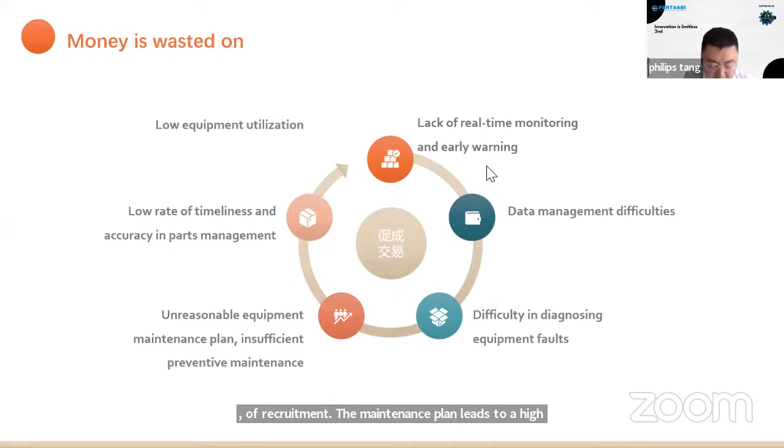This is the first. Second, unreasonable equipment maintenance plan, insufficient preventive maintenance technique. Lack of an effective equipment maintenance plan leads to a high failure ratio of equipment, and the lack of preventive maintenance of the equipment leads to shortened life and frequent equipment failures and prolonged maintenance cycles. Maintenance cost is increased and productivity is affected. Having a good plan facilitates parts forecasting and stocking.

Third, real-time monitoring and early warning. This is important to monitor the states and performance indicators of the equipment in real time, to detect faults or abnormal conditions in time. Lack of this results in increased equipment downtime and decreased production efficiency. The lack of monitoring the device and analyzing its long-term performance makes it difficult to find parts that need to be replaced in time, which affects the timeliness of parts supply and will inevitably increase the inventory of parts to deal with emergency repairs.

Next, data management difficulties.

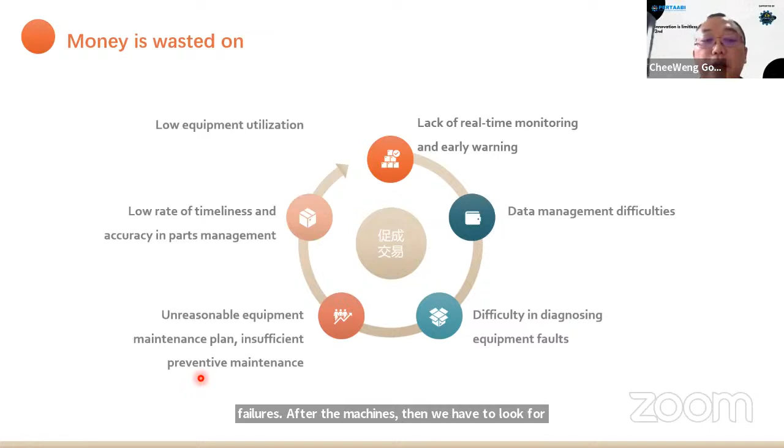Number 4, he says that most of these mining companies in China do not have a proper maintenance plan. When we require a maintenance, it's always on an ad hoc basis. If there are no maintenance plan, therefore it's always failures after the machines, then we have to look for spare parts. This actually causes insufficiency of preventive maintenance.

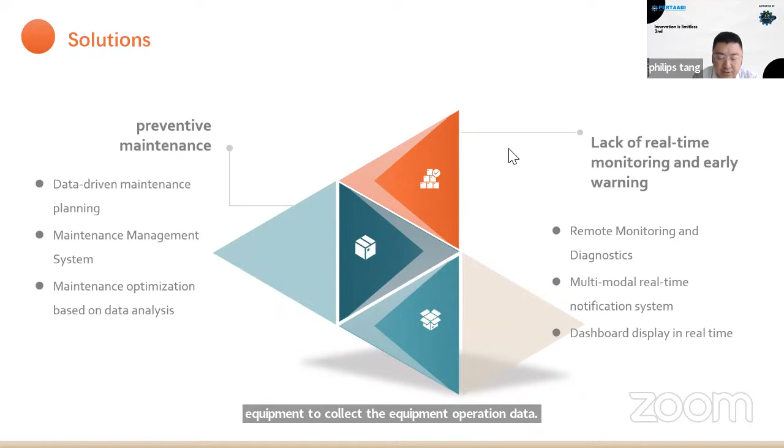Preventive maintenance - data-driven maintenance plan. Use sensors and monitoring equipment to collect equipment operation data and predict equipment failure and maintenance needs through data analysis and machine learning. Based on the data-driven prediction results, make a reasonable maintenance plan, schedule maintenance work in advance, and reduce repair cost and equipment downtime.

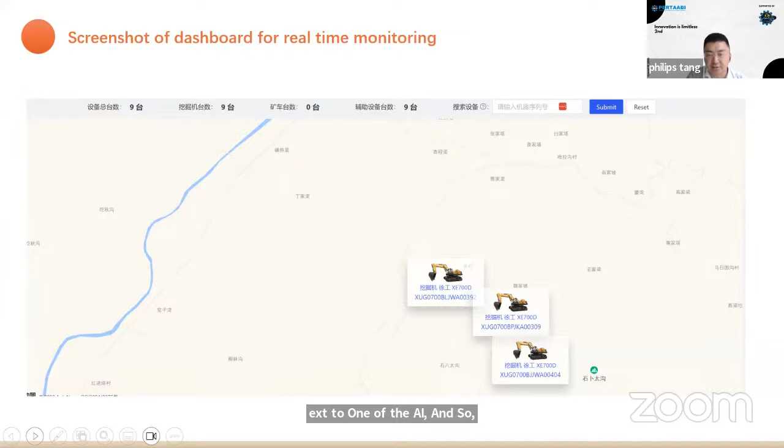The maintenance management system is based on a big data fault detection system. We have noise recognition and AI technology - through sound and sensors we can detect equipment faults before they happen, and prepare parts in advance. He has come up with a preventive maintenance system that can predict machine failure by detecting the noise level produced by machines. The system captures the noise with sensors, processes this data, and can give you a signal or alarm telling you the probabilities of failure for each component.

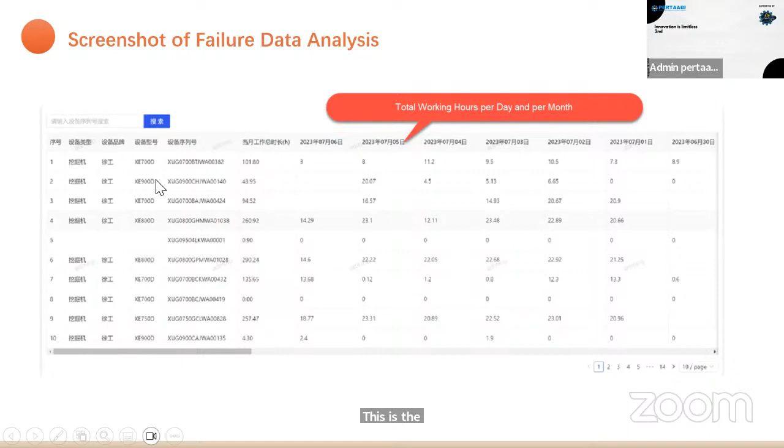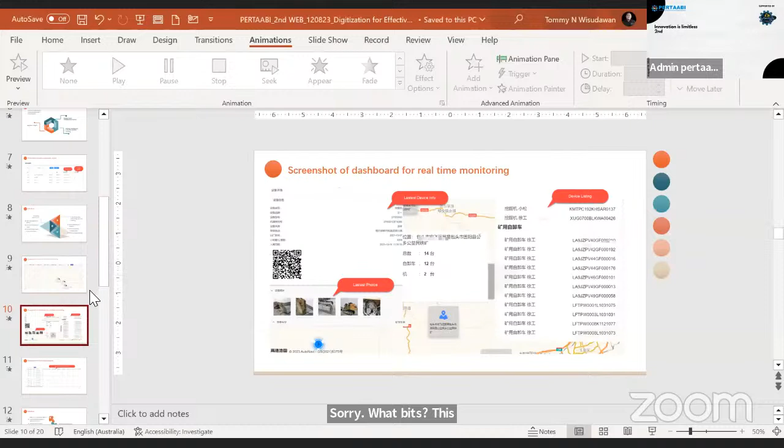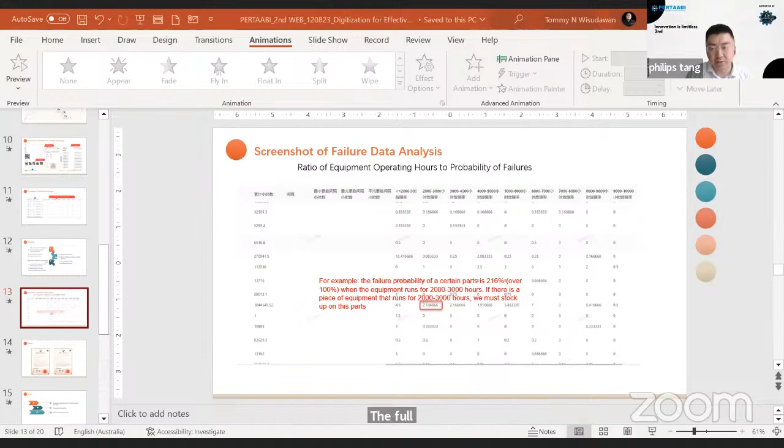Next, let's see the screenshot. Is this the page? Previous slide. Which one? Sorry, the slide is on automatic slideshow. Is this the one? Screenshot of failure data analysis report, ratio of equipment. Is this the correct one? What page? This page? Page 13? Failure data analysis - oh okay, this one, page 13. Mr. Go, slide number 13, right? Screenshot of failure data analysis - is it this page on screen now? Yes, this is the slide.

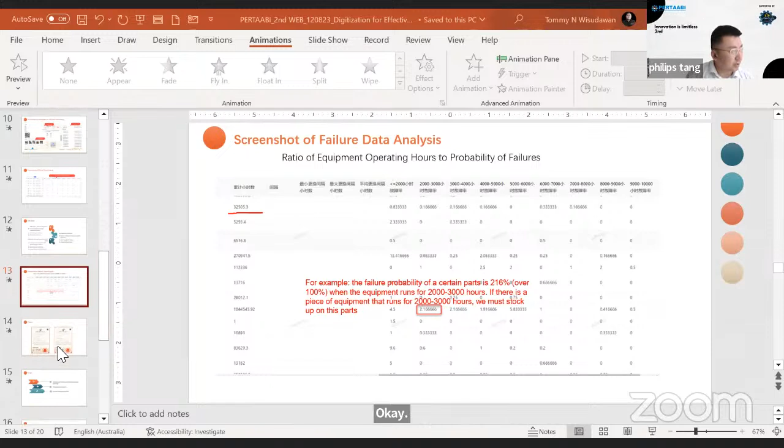Okay, I'm done explaining. Jump to slide 18 - case studies and the benefits for the customer.

Create revenue for the users and bring high profits. This is one of our successful cases to share with you.

Mr. Chong, do you want me to help share the full screen? Let me help translate this page for you. This is the last page Mr. Tang is trying to share - he's trying to show the results.

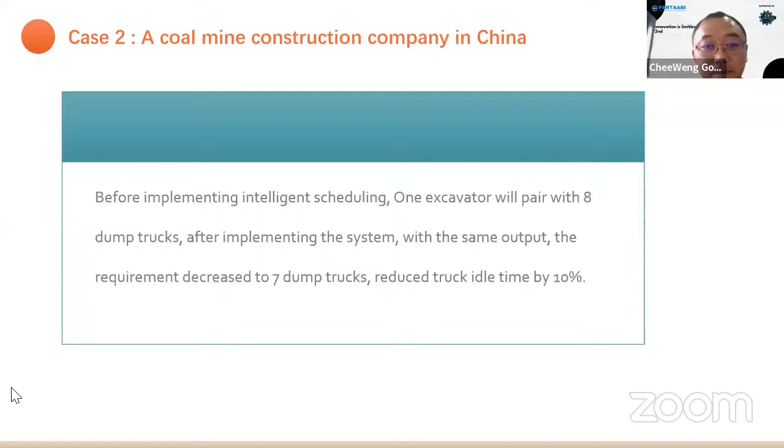I think it's the previous one. Okay, this is the last page Mr. Tang is trying to share today, showing a before and after comparison of a mining company in China that uses his system.

Mr. Wang says he's very honored today to be invited by PERTAABI this morning, and he's very happy to be here sharing his work about the intelligent automatic lubrication system, and why the automatic lubrication system is the trend in the mines of Inner Mongolia. He's very excited to share about his topic today.

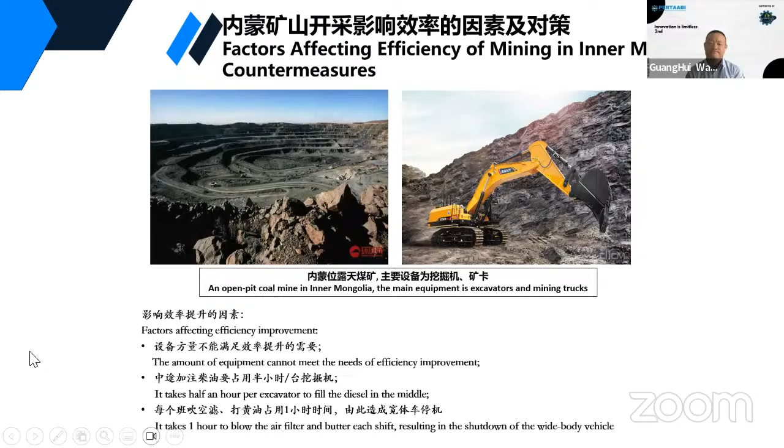In Inner Mongolia, the practice is to change operators without changing machines, so the machine works continuously. During each shift change, the operator must clean the air filter and apply grease, which takes about 1 hour, during which the mining truck must stop operation.

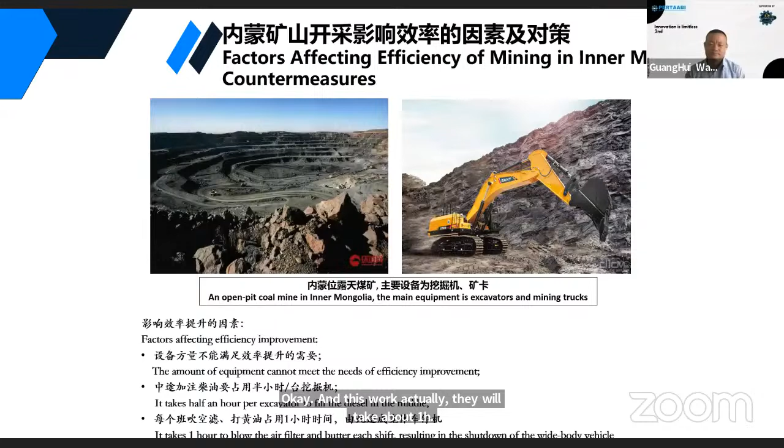Next slide please. He will now share solutions to address the problems mentioned above.

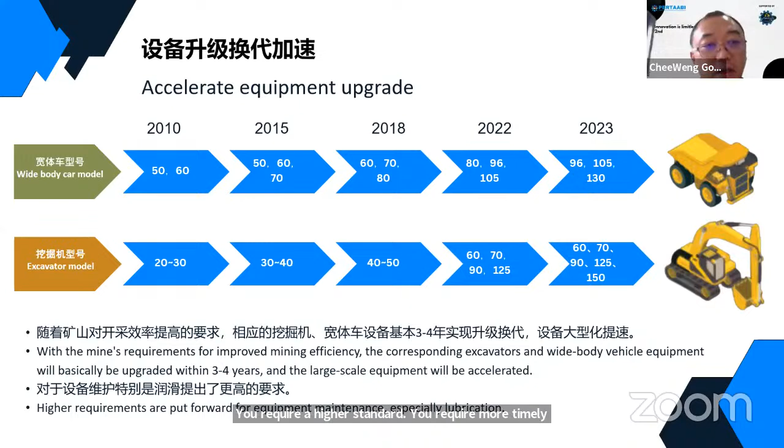Before it was 1 hour, now it's 6 minutes. Before it was half an hour, now it's 6 minutes. For 100-ton excavators, before introducing these large fuel dispensers, it required 30 minutes to pump fuel, but now with larger dispensers, it only takes 6 minutes. This shows that every second counts in mining operations - they will do whatever possible to reduce fuel-adding time.

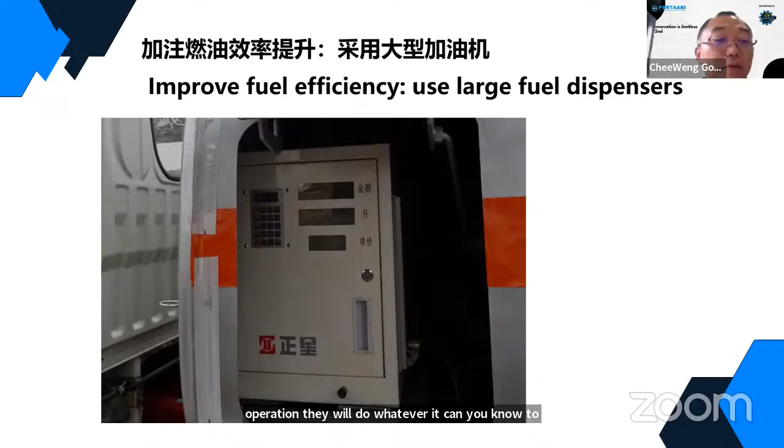To reduce the maintenance time required for machines, there are two key things: one is to introduce a better air filter, and the second is the greasing process.

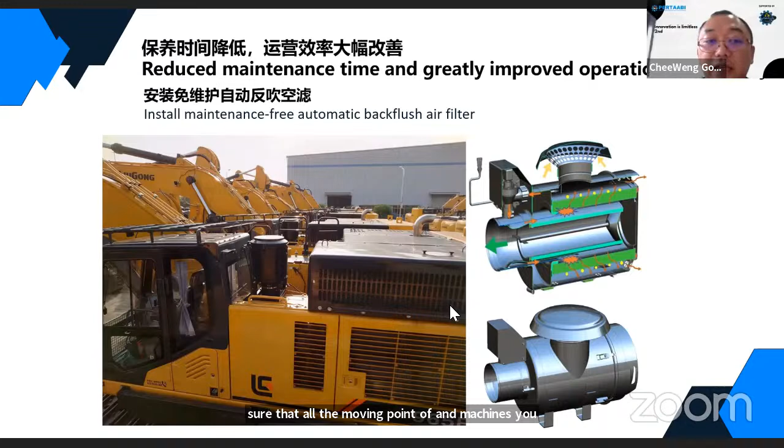这里面就是打黄油这个呢，就是每天都要从事的，而且呢频率很高的，2个班呢都需要进行动态的、实时的这种维护和保养。

He's going to show how this automated lubrication system can improve operational efficiency. Lubrication, the greasing work, is actually very crucial for maintenance of the machines. 内蒙的工况下来是换人不换机，因为这个挖掘机一打黄油，这个矿卡就要停下来，因此呢改变了，加装了自动润滑系统。

王总，您要不要讲解一下您这个表怎么解读呢？我讲解一下，你先翻译一下。He's going to share with us the results after applying his automated lubrication system.

从几个方面进行数据分析。第一个，从出勤率方面，没加装自动润滑前，每天因为是2个台班，误工了2个小时，1年施工按照300天算，每年的收益损失就是36万美元。Before installation of the automated lubrication system, assuming there are 2 shifts, one shift is about 10 hours, every shift requires 2 hours just for greasing work every day. Assuming one machine is working for 300 days, at the end of the day, for each machine there is an annual loss of $360,000 just because the machine needs to stop for greasing works.

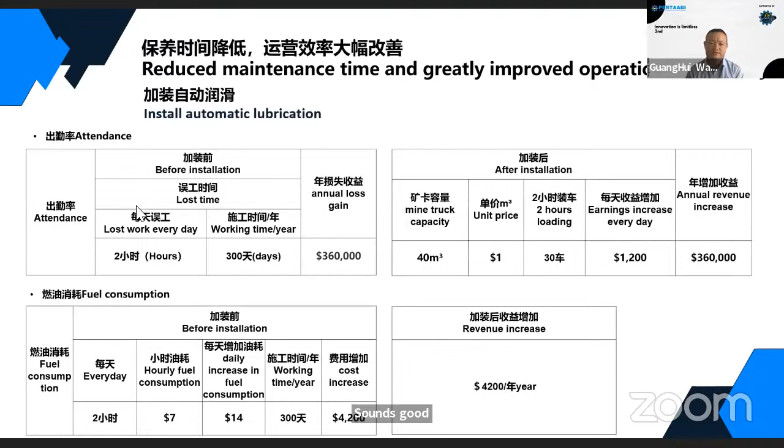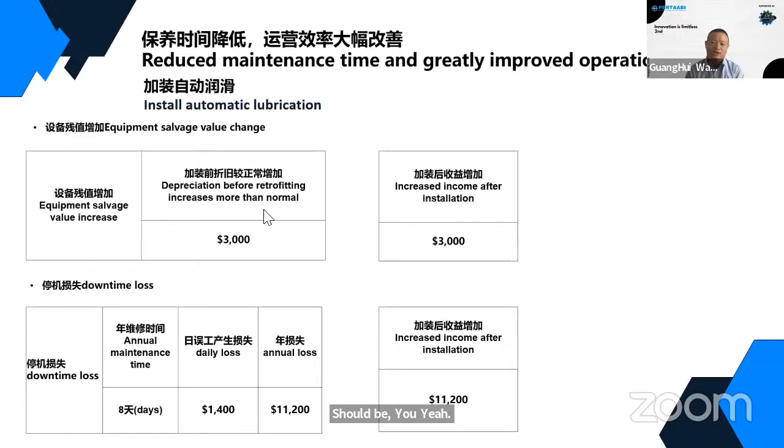设备残值的一个增加，就是没有加装自动润滑前，如果说这台挖掘机轴套都是光的，会导致残值率大幅下降。我们算了一下，1年大概这个挖掘机除了正常贬值的情况下，会下降3000美元。3000美元是每1年吗？每1年。Mr. Wang says that now he's talking about the residual value of the machine.

Okay, if we do not do a proper job for the greasing work, if we do not install the system, if we rely on the operator to do the greasing for the machines, actually it causes more damages to the machine and resulting in more depreciation. Based on a conventional or traditional depreciation, that will cost $3,000 more annually based on their studies, if we do not do a better greasing work. 根据我们对挖掘机客户的数据统计，加装完自动润滑呢，比正常的没加装的轴套的寿命延长大概2年左右，所以每年的收益增加，对它的残值率是增加3000美元左右。Okay, if we install the system, if we let the greasing work go automatically, then the machine condition will become better and we will have a better residual value. Instead of $3,000 more in depreciation, then we can convert this to become our income.

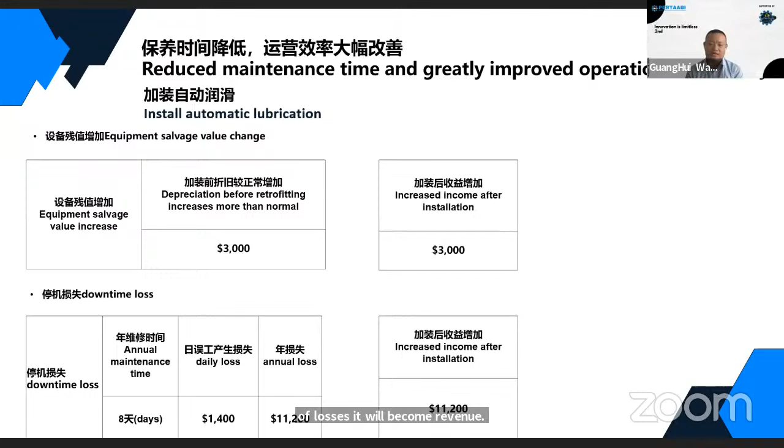维修费用呢，我们也给算了一下，每年的维修费客户从每年3000美元左右，这个数据也是没加装前比较保守的一个数据。为什么呢？因为设备越来越大，轴套成本非常高，仅动臂这一个下来可能3000美元都不止。加装后呢变成了收益。Okay, this $3,000 is the money spent to replace the pin bush for the boom and stick annually. If we install the systems, we do not need to change the pin and bush, we do not need to do maintenance so regularly. Therefore, this $3,000 spent instead will become our revenue.

王总，您继续。再一个就是对油脂的浪费，因为自动润滑是定时定量，节约油脂，实时润滑。每个月人手动润滑要多浪费，以一个80吨左右的挖掘机为例，每月要多用30升，每月的浪费在100美元，每年在1200美元。加装后呢，这个浪费变成了收益。Okay, let's talk about the grease wastage. If we depend on the operator to do the greasing work, every month there will be additional 30 liters of grease wasted. Converted into dollars, it will be $100, so the annual loss will be $1,200. But if we apply the smart automated lubrication system, the grease will actually input at the right amount, at the right quantity, at the right time. Therefore, no wastage.

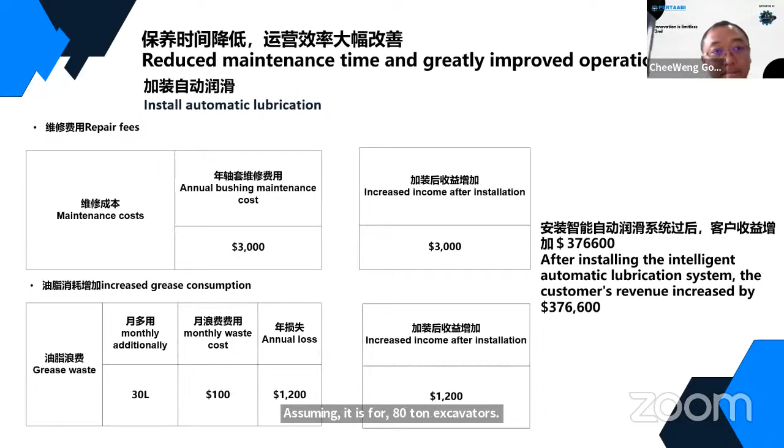下一页。Next slide, please. 这是我们的一些案例展示，这个自动润滑适用于所有机械设备的润滑，它的应用范围是非常宽的。Mr. Wang is showing his case study. He's telling everyone that his system can apply to all kinds of machinery, such as wheel loaders, mobile crusher, excavators, and boring machines.

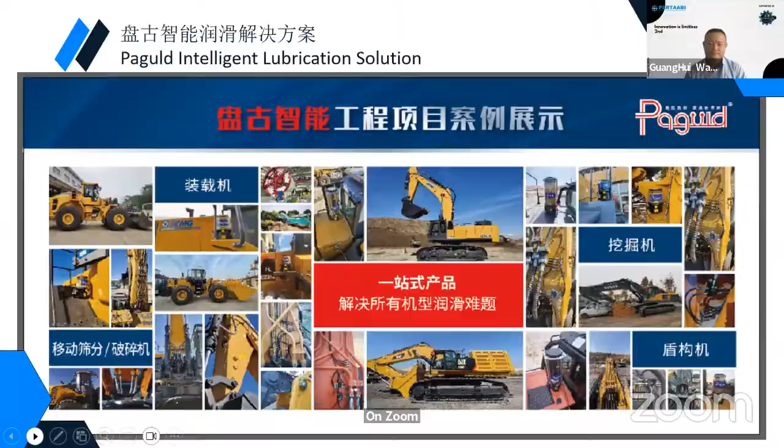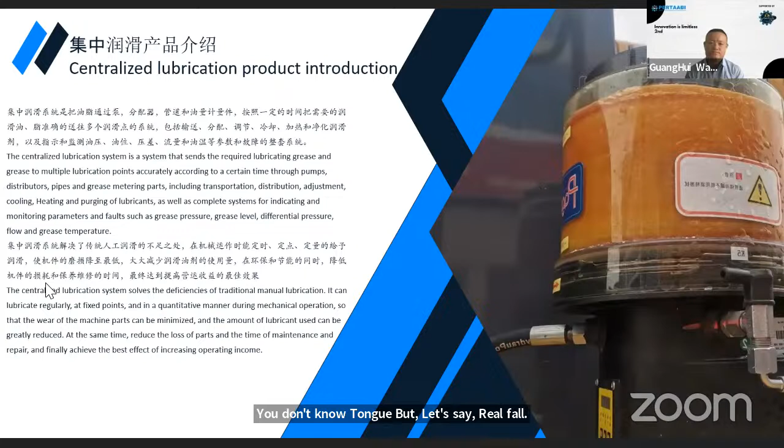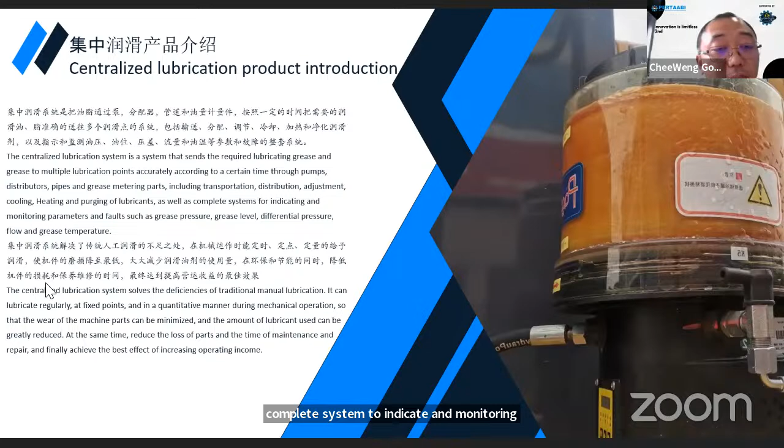王总，请下一页。Next slide. 集中润滑就是这套系统，是通过一个泵来把所有的润滑点根据需求匹配起来，通过定时定量，它有自动记忆的功能，来实现每个润滑点定时定量的润滑。Mr. Wang says that the centralized lubrication system is a system that sends the required amount of grease to multiple lubrication points of the machine accurately, according to a certain time, through the pump, through the distributors, pipes, and the grease metering parts, including transportation, distribution, adjustment, cooling, heating and purging of lubricants, as well as a complete system to indicate and monitor parameters and faults, such as grease pressure, grease level, differential pressure flow, and grease temperature.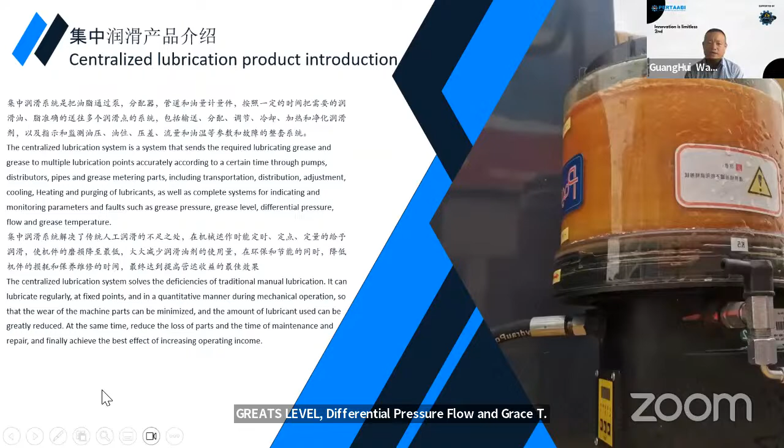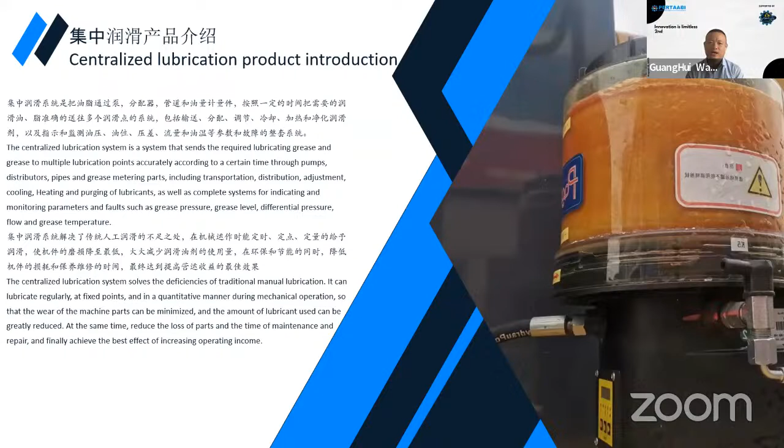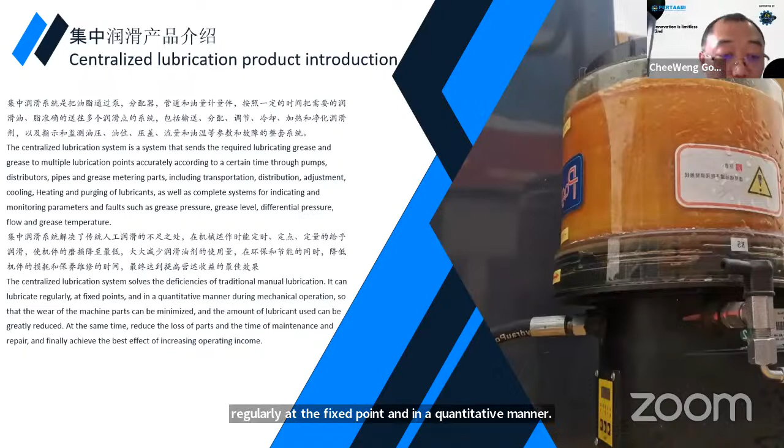王总，您继续。自动润滑与传统人工相比，它是定时定量，而人工润滑是凭感觉润滑，对润滑效果来讲还是有差别的。所以自动润滑是个必然趋势，欧美是个标配。Okay, for the automated lubrication system, compared to the traditional manual lubrication, it lubricates regularly at a fixed point and in a quantitative manner during mechanical operation, so that the wear and tear of the machine parts can be minimized. However, based on traditional manual lubrication, the operator normally will base on their gut feelings - they think these points have good enough greasing, then they will stop. It's solely based on the gut feelings of the operator. Right now in Western countries, the lubrication system has become a standard accessory for machines.

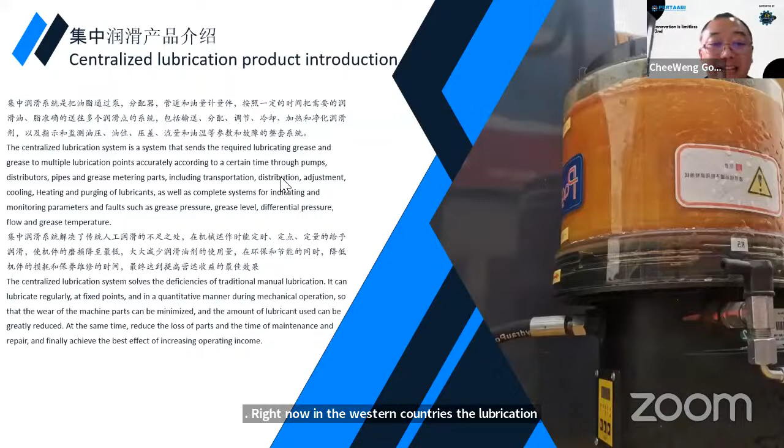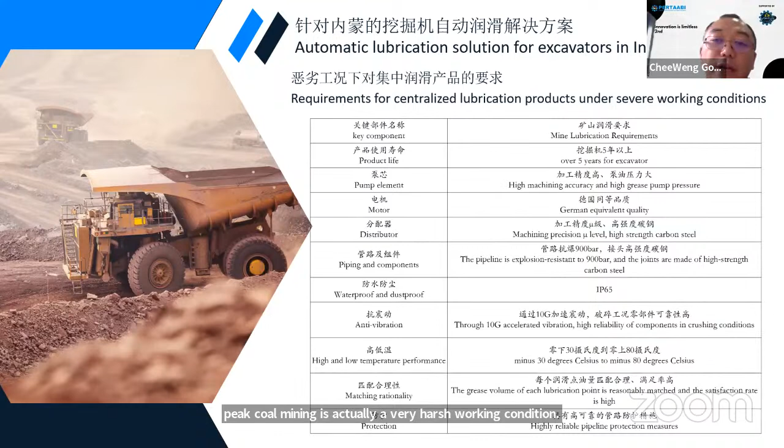王总，您继续。下一页，请下一页。针对内蒙的自动润滑，这里面呢，挖掘机和矿卡是最恶劣的产品，所以这种工况对集中润滑的要求也是非常高的。Okay, especially for Inner Mongolia, the open pit coal mining is actually a very harsh working condition. Therefore, the requirements for this automated lubrication system actually have a very high requirement.

王总，您继续。所以这里面首先是产品的寿命，刚才前边我们这位朋友也问过，他对这个考验是很大的。既然考验，那我们在矿山上的挖机寿命至少要有5年以上的设计，因为他们换机基本上3年。Mr. Wang says his automated lubrication system product lifespan can be more than 5 years for excavators.

您继续。这里面对泵芯和分配器的加工精度，我们能达到3微米到5微米，配合精度非常高，同时强度也比较高。Okay, for the pump core for the automated system and the distributor, has a very high machining precision. They will go for a very precision high pump oil pressure.

同时电机呢，我们采用德国进口的一些电机，保证了这个产品在适用恶劣工况下的一些性能。Okay, as for the electrical motor, they actually engage German equivalent quality ones to ensure that the performance of the automated lubrication system is up to mark.

Piping and related components require high explosion resistance, leak resistance, and vibration resistance. They actually engage piping with more than 900 bar explosion resistance using high strength carbon steel connectors, so it can withstand very harsh working conditions.

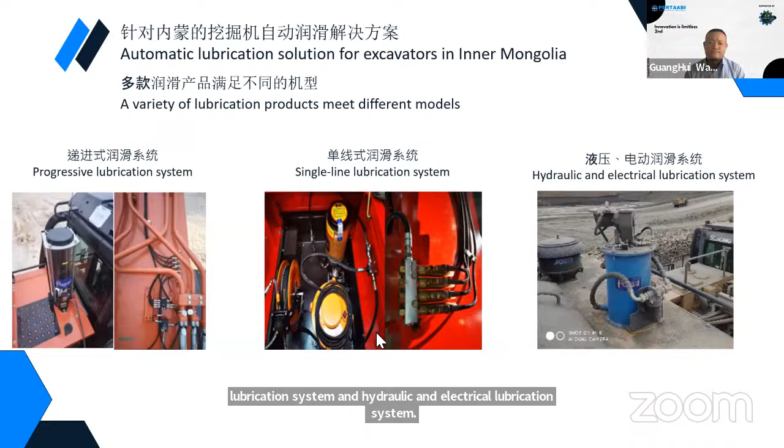Based on customer needs, we also offer multiple lubrication solutions: full-vehicle lubrication, partial lubrication, and lubrication designated for breaker hammers. They can provide full machine lubrication including the bucket, partial lubrication depending on which moving parts need it more, and designated hammer lubrication.

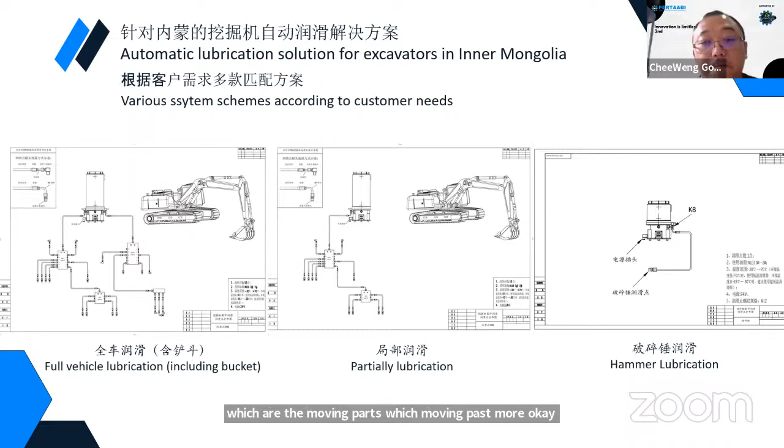Given the harsh mining conditions, reliability requires several safeguards. First, precise oil quantity matching for each lubrication point is critical since different excavators, large or small, require different matched oil volumes; for different machine models this precision matching is very accurate, and we have mature solutions. This means it is a smart system that can detect which points require more grease and supply more, and which parts move less and supply less grease accordingly.

The lubrication system's ability to adapt to harsh conditions, along with a real-time dynamic monitoring system, allows it to withstand any kind of harsh environment and know the status of the system, whether it's working well or not.

For protective measures on the excavator bucket, especially for aftermarket installation, the requirements are very high, and we have many mature solutions for the bucket and attachment protection, since that is the most critical part in terms of moving frequency.

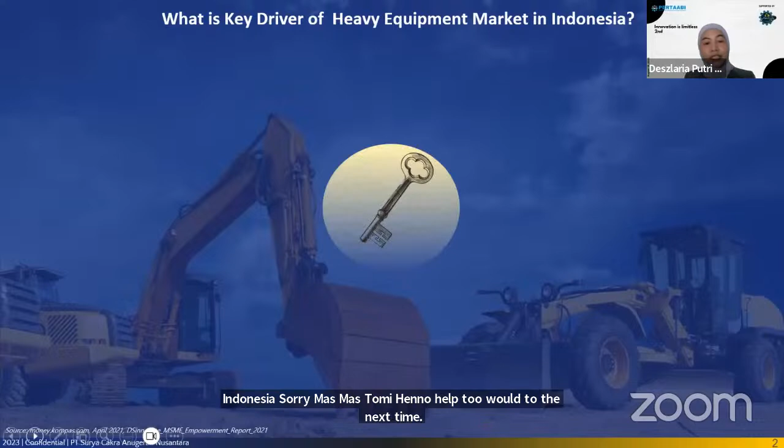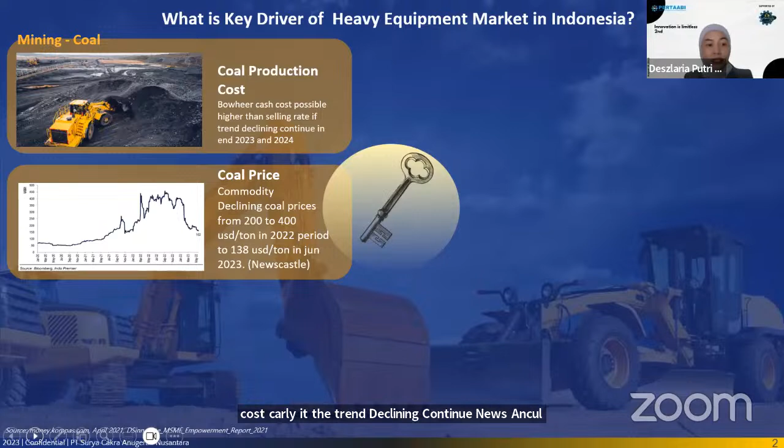I'm sorry Mas Tommy, can you help move to the next slide? Talking about the heavy equipment market in Indonesia, the market is determined by macro sector conditions, majority due to commodities. First is mining, for example coal mining. What matters is coal production costs. Currently if the declining trend continues until the end of 2023 and into 2024, bowheer cash costs could possibly be higher than the selling rate. Then the coal price - currently there's a declining coal price, from 200 to 400 USD per ton in 2022 last year, down to 138 USD per ton in June 2023 this year. Another mining sector is nickel mining, where there is some market uncertainty due to government policy.

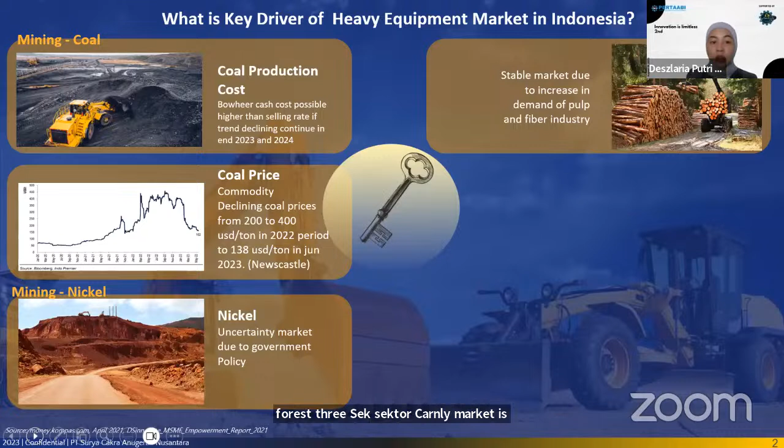And then next is the forestry sector. Currently the market is stable due to the increase in demand from the pulp and fiber industry. Then the agro industry sector, there is an increment in the crude palm oil price trend. And then also important is the construction sector. We know the budgetary infrastructure continues to increase and it strives to complete strategic projects before the election in 2024.

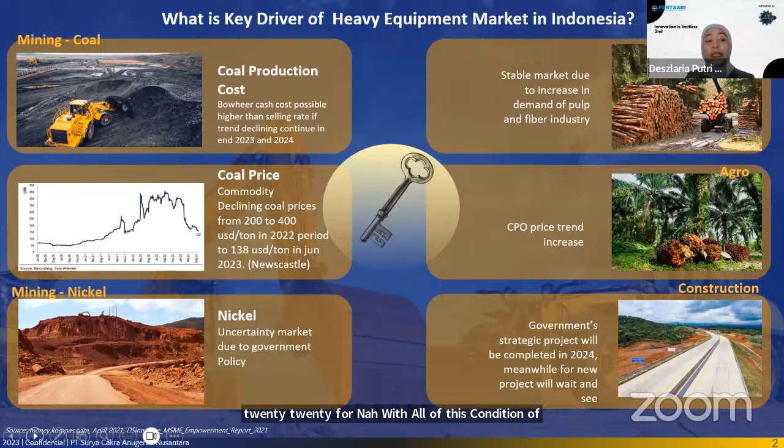Move to the next slide. Now talking about used equipment, here are some key considerations to keep in mind when deciding whether to buy used heavy equipment. First is financial situation - if you are looking to save upfront costs, purchasing used equipment can provide a way to acquire necessary equipment without overextending financially, Bapak Ibu. Then also about risk tolerance - you can find used equipment that is practically as good as new, while avoiding the steepest period of depreciation, and also having a lower insurance cost. Then about lead times, if you have short-term projects with specialized equipment requirements, buying used could be a practical solution to meet those needs without long-term investment.

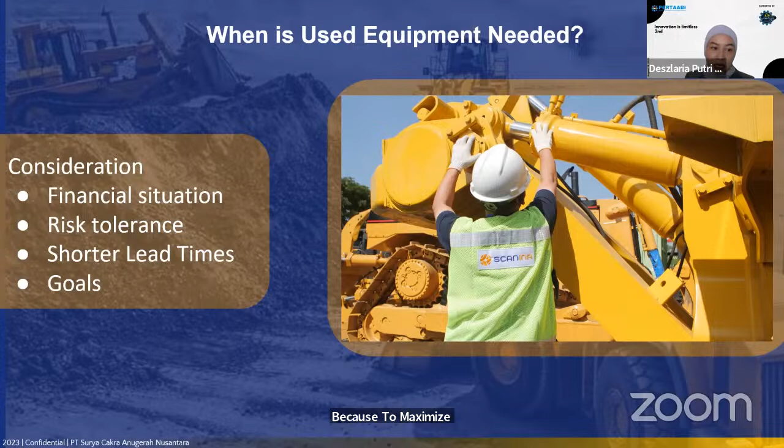Currently, if we review it further, we see there are 7 models of transaction types of heavy equipment, usually done face-to-face or through contact with one another, which mostly found in number 2 and 5. It's through used equipment trader, Bapak Ibu.

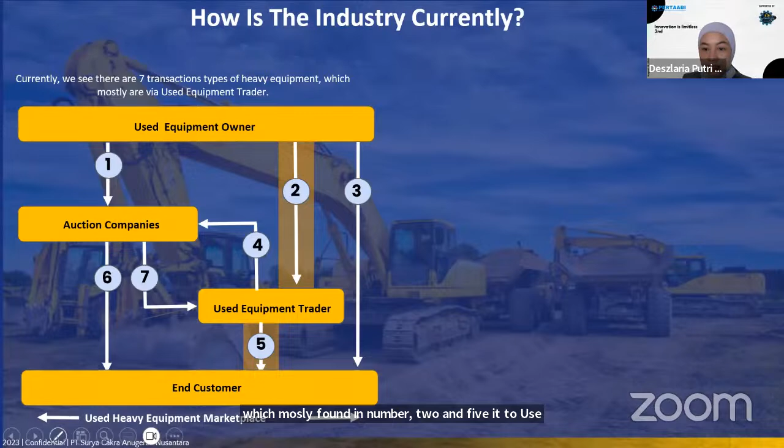Besides from the previous observations, interview, and research that we have carried out, the main difficulties we found are on the merchant side, heavy equipment sellers have limited networking to get potential buyers or tenants, as well as the fair value unit. From the buyer side, they have limited information on the product being sold, and difficulty comparing one product to another.

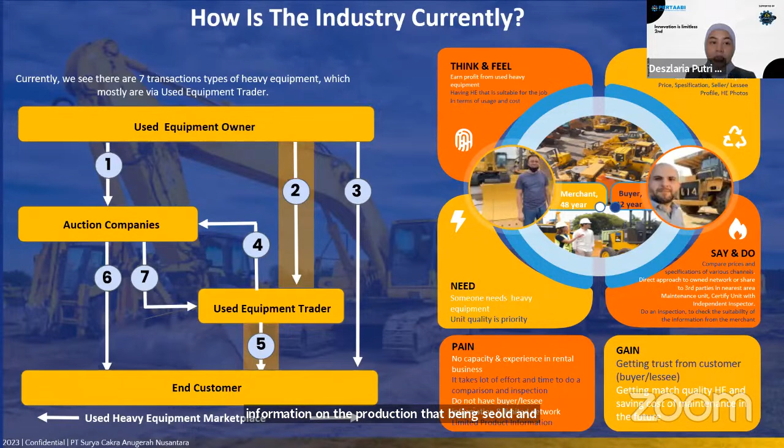Now, because the theme of our webinar today is about innovation, what does this have to do with innovation in the heavy equipment industry? Besides e-commerce trends for retail products that we know are on the rise, some of the big players in Indonesia like UT, Volvo, Trakindo are also developing innovation to capture customer needs, such as developing monitoring heavy equipment applications, monitoring unit performance, and etc.

On the sales and marketing side, this digital innovation also pushes us to always follow the technology. We improve our company website to be more communicative, create mobile apps to get close to our customers, and use social media marketing to build awareness and connect with our customers. Here comes Scanina to assist merchants in accessing wider markets and to assist buyers in making decisions to purchase heavy equipment more effortlessly.

A bit about Scanina, Bapak Ibu. Scanina was launched last year in 2022 under PT Surya Cakra Anugerah Nusantara, or PT Scan. We are currently together with around 30 merchants for buy and rental category, and we will expand to service and spare parts categories.